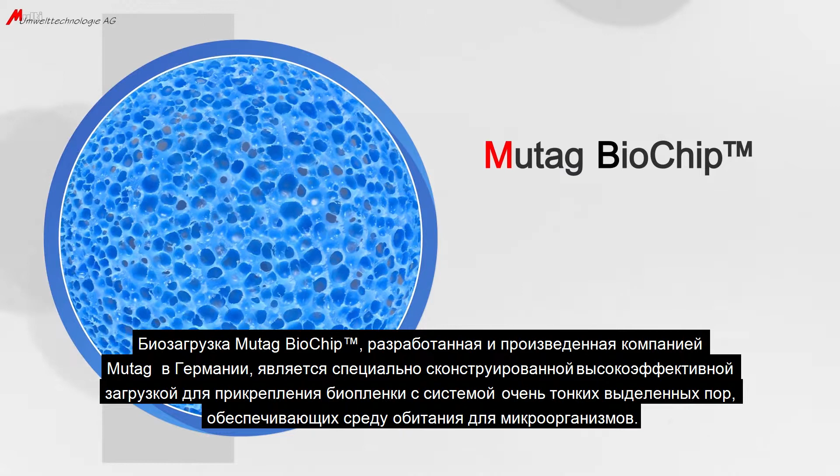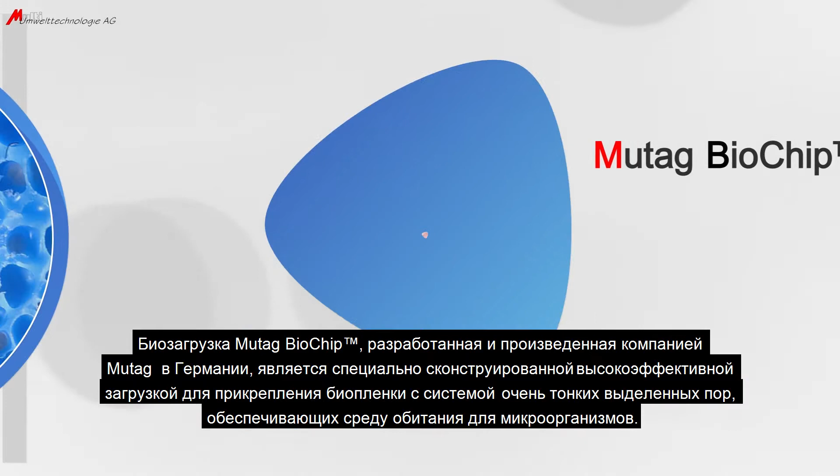The Mutag BioChip, developed and produced by Mutag in Germany, is a specially designed high-performance biofilm carrier with a high-grade pore system which provides a habitat for microorganisms. It is based on experience and extensive research and development. There are several hundreds of successful applications worldwide.

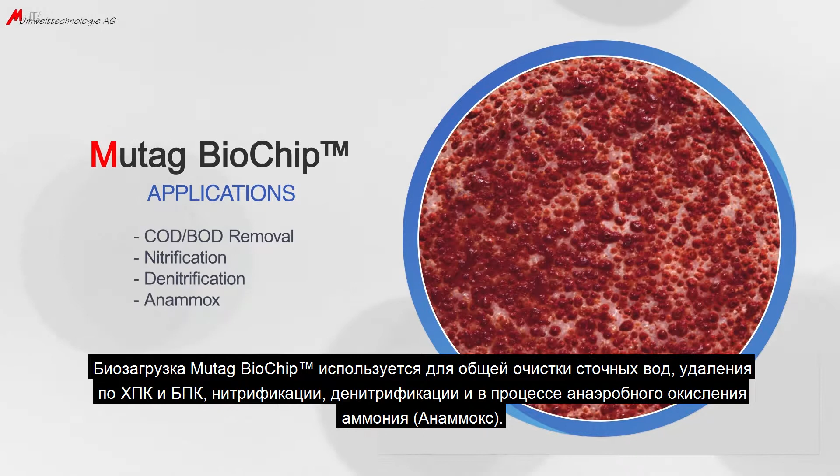There are MBBR plants which are treating more than 50 tons of COD per day, or more than 3 tons of ammonia per day. The Mutag BioChip is used for water and wastewater treatment in general for COD or BOD removal, nitrification, denitrification, and also for Anammox application. The Mutag BioChip is also used in many aquaculture applications for denitrification and nitrification too.

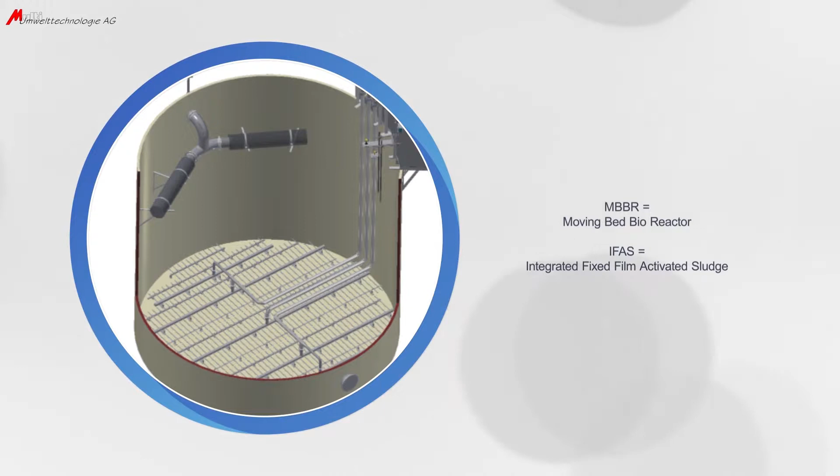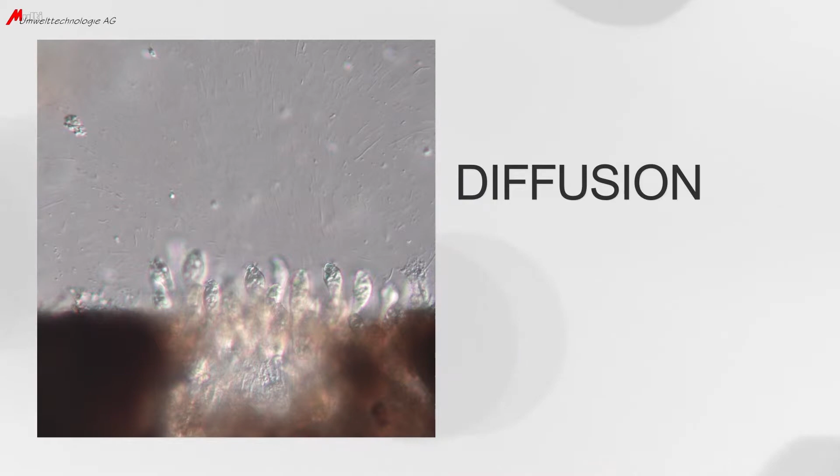The Mutag BioChip can be used in MBBR-based plants or in combination with activated sludge as IFAS system. The Mutag BioChip provides a lot of advantages, whereas we will now especially focus on the subject diffusion. As known from biochemistry and cellular biology, the exchange of substances and oxygen is essential for cells as a precondition to uphold their metabolism. In order to keep them alive and active, the microorganisms need to be supplied with nutrients and oxygen, which is the sticking point that leads us to the topic diffusion and diffusion depth.

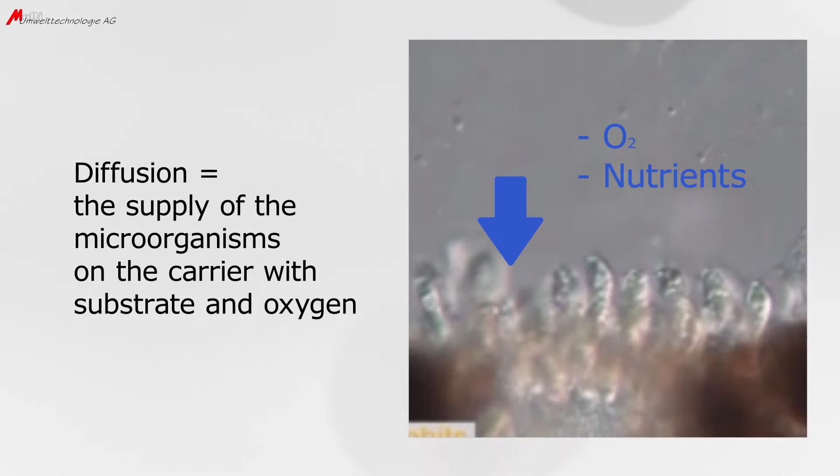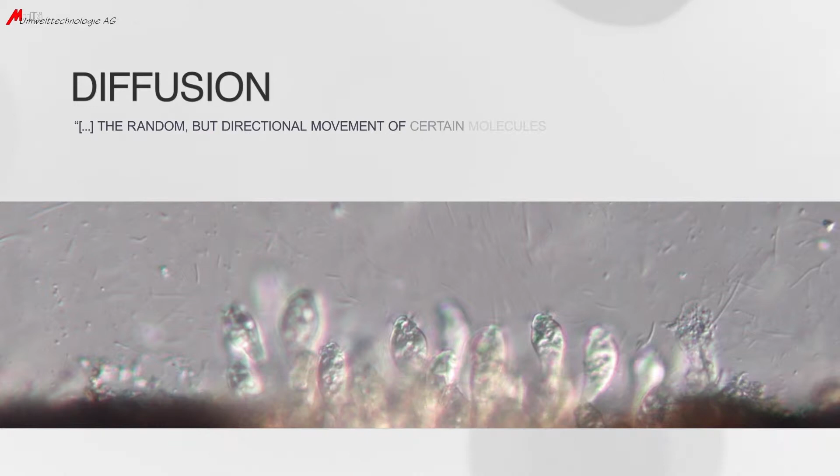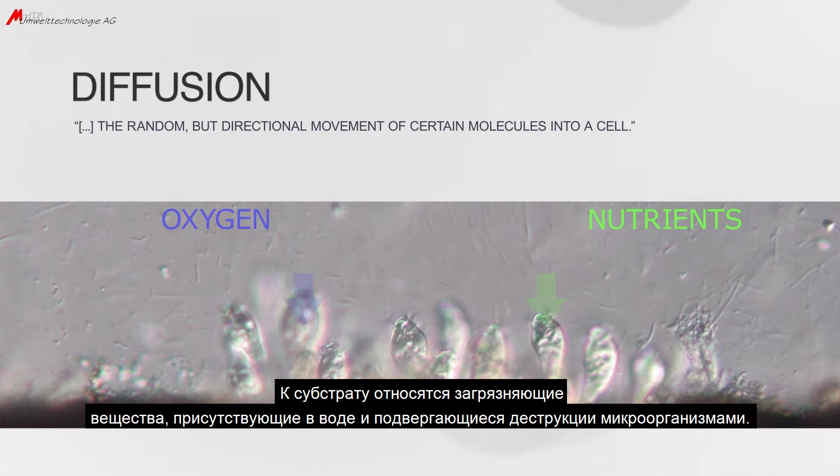As per the definition, diffusion shall mean the random but directional movement of certain molecules into a cell. The diffusion effect in biofilm processes has to be understood as the feed of substrate and oxygen molecules into the active biomass. Nutrients, like for example phosphorus as well as oxygen, diffuse from the surrounding water into the active biofilm and supply the microorganisms in the pores. In other words, diffusion is to be understood as the supply of biofilm or the microorganisms on the carrier with substrate and oxygen. Substrate refers to the pollutants being present in the water which are to be degraded by the microorganisms. A sufficient diffusion is an essential factor for the removal performance of active biomass.

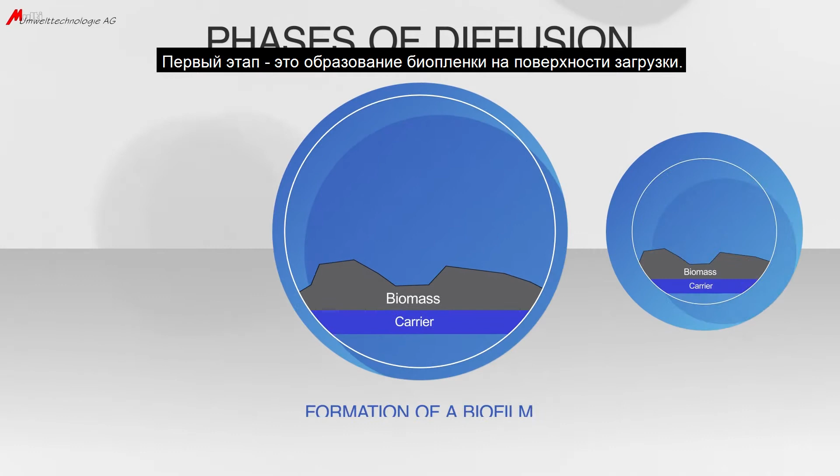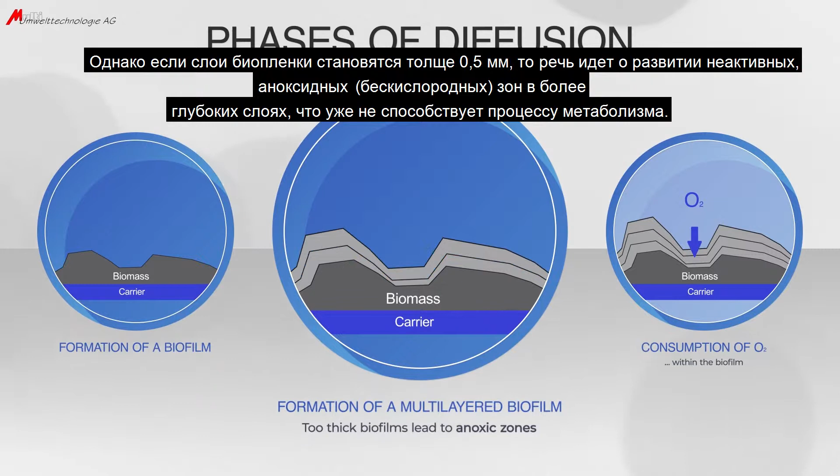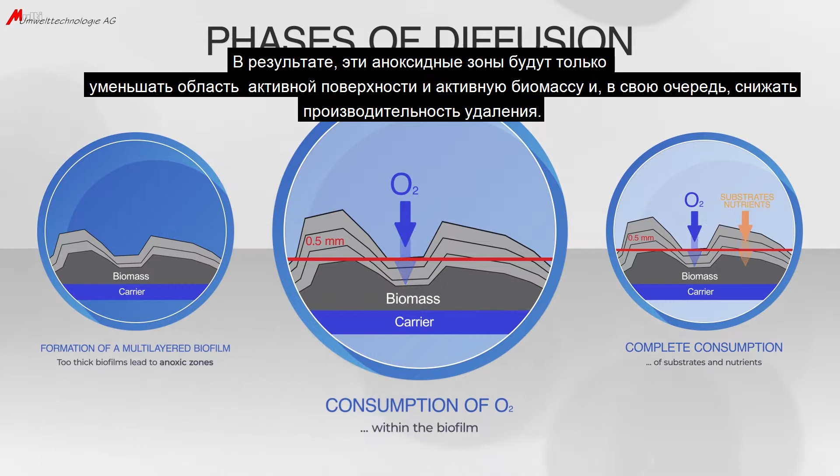The diffusion depth is limited to approximately 0.5 millimeters, which can also be found in related technical literature. The term diffusion depth shall mean the limit of a biofilm layer thickness up to which the biofilm can still be sufficiently supplied with nutrients and oxygen. There are different phases of diffusion. The first one is the formation of a biofilm on the carrier surface. Then, the biofilm is getting thicker. However, if the biofilm layers are getting thicker than 0.5 millimeters, it comes to the development of inactive anoxic zones in the deeper layers, which will not contribute to the metabolism process anymore. As a consequence, these anoxic zones will only reduce the available active surface area and active biomass and in turn will lower the removal performance.

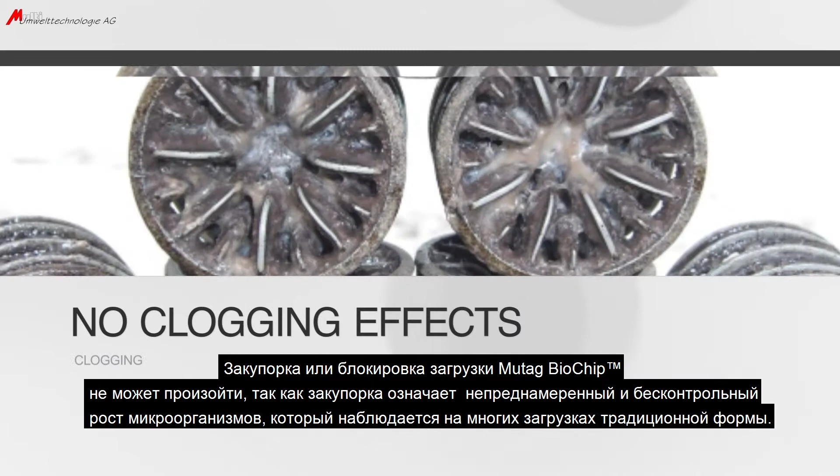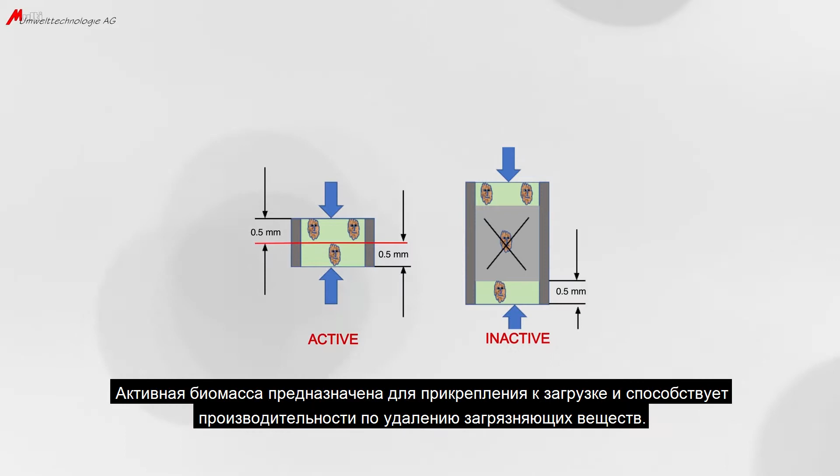A clogging or blocking of the Mutag BioChip cannot occur, whereas clogging shall mean the unintended and uncontrolled growth of microorganisms, as it can be observed with many conventional tube-shaped carriers. At this point, it is of special importance to distinguish between active and inactive biomass. Active biomass is intended to be kept on the carrier and contributes to the removal performance. Inactive biomass is dead biomass, which can clog conventional carriers and only reduces the removal performance.

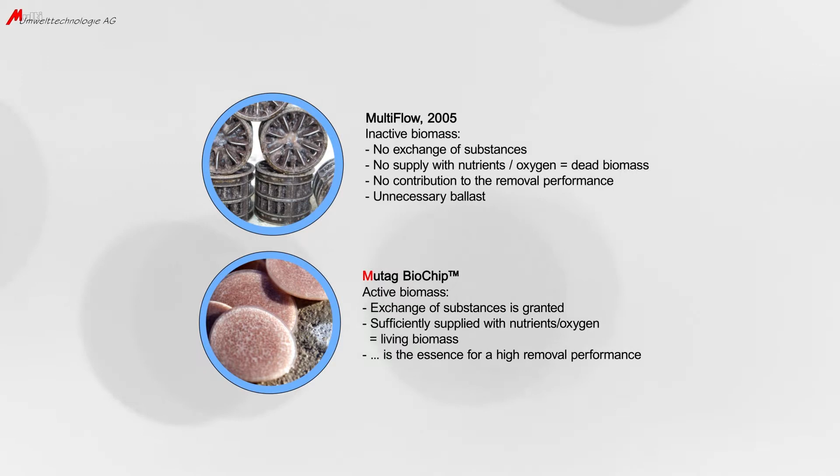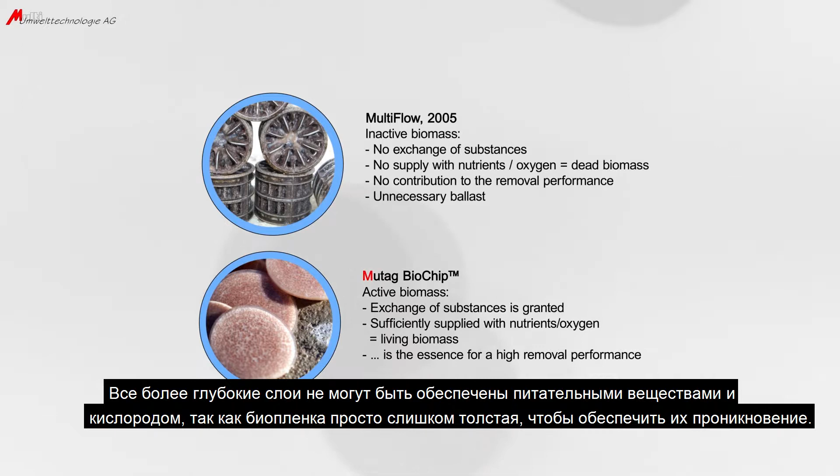As you can see here, both carrier types contain biomass. The tube-shaped carrier is completely stuffed with biomass, whereas the limited diffusion depth of 0.5 mm will take its toll. Only 0.5 mm of all the external space is occupied with active biomass. All deeper layers cannot be supplied with nutrients and oxygen, since the biofilm is simply too thick to be supplied. All biomass located in the deeper layers does not contribute to the metabolism process, and is hence unnecessary ballast, which is still being moved around the MBBR, having a negative impact on the operational costs.

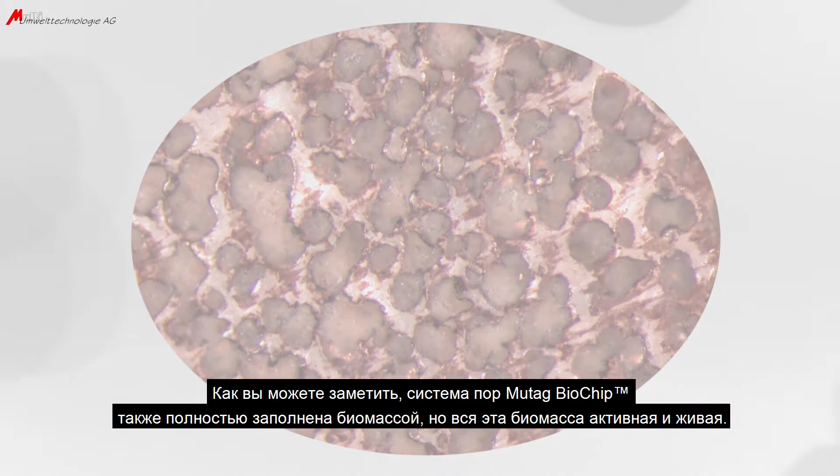As you will observe correctly, also the pore system of the Mutag BioChip is completely filled with biomass, whereas the point here is that all this biomass is active and alive. In fact, the Mutag BioChip provides a self-cleaning effect, which ensures that clogging is simply not possible to happen. Due to their specific shape and the light weight, the Mutag BioChip carriers provide excellent motion characteristics, and once the carriers collide with each other or with the tank wall, any excess biomass which is trying to grow out of the pores will be sheared off, the so-called self-cleaning effect. Consequently, the biofilms are permanently kept at a thickness of 0.5 mm from both sides, whereas an optimal biofilm layer thickness and optimal diffusion is attained.

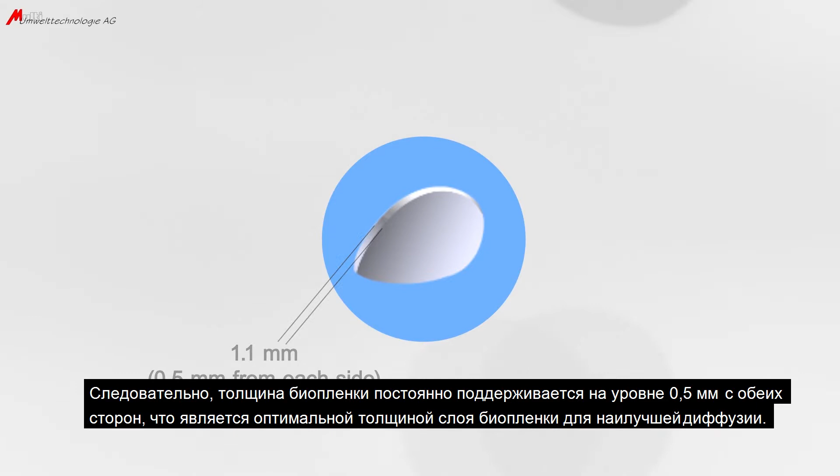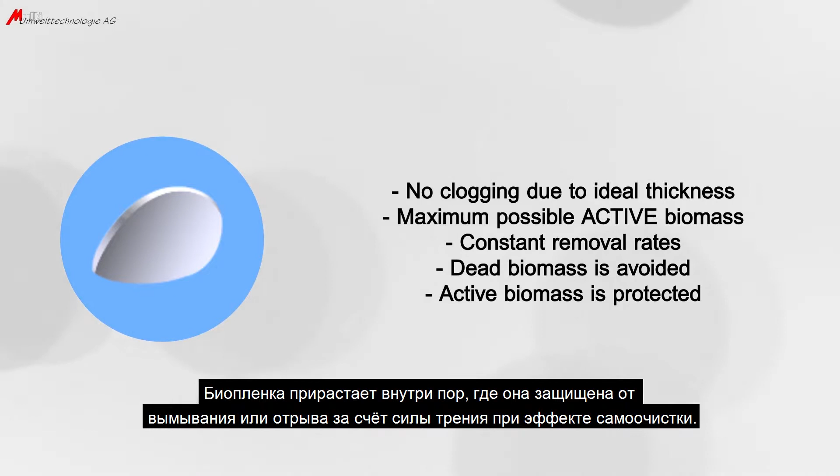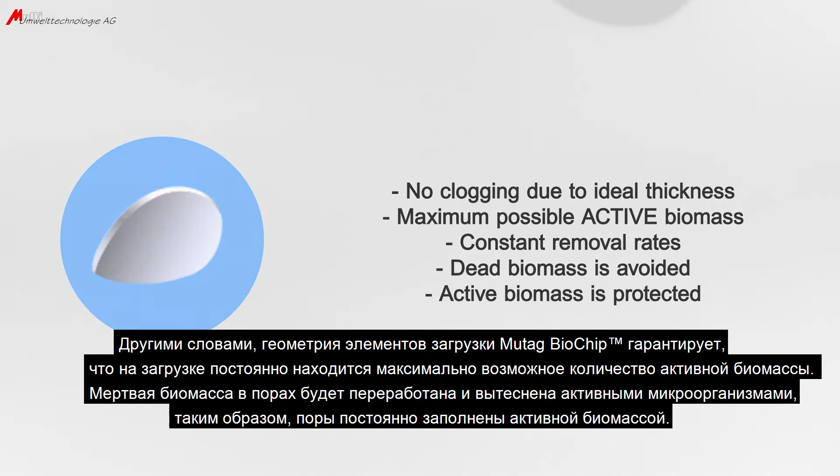On the other hand, there is no need to worry about a potential loss of active biomass on the Mutag BioChip. The biofilm establishes inside of the pores, where it is protected against being flushed or sloughed off by the self-cleaning effect. In other words, the geometry of the Mutag BioChip ensures that the maximum possible amount of active biomass can be permanently kept on the carrier. Dead biomass in the pores will be metabolized and displaced by active microorganisms, whereas the pores are permanently filled with active biomass.

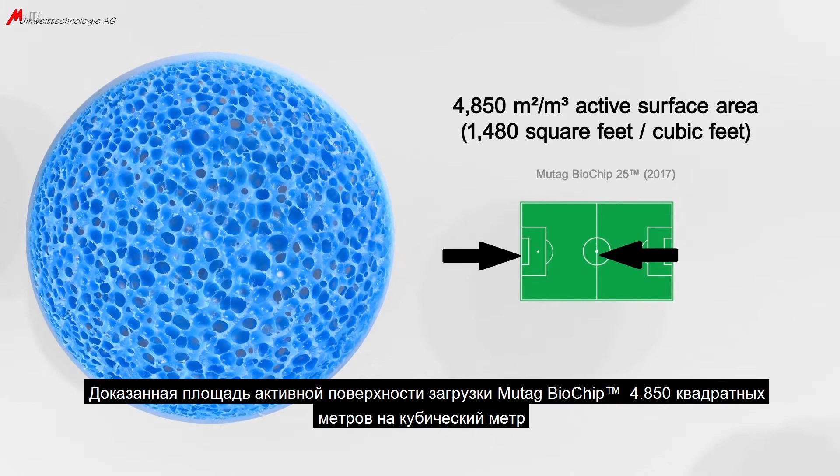The active surface area of the Mutag BioChip is certified with 4,850 square meters per cubic meter or 1,480 square feet per cubic feet. It is, however, not the surface area which is important for the removal performance. Crucial is the amount of active biomass in the pore system. A pure surface comparison of porous carriers is not correct and can lead to extreme differences in the removal performance.

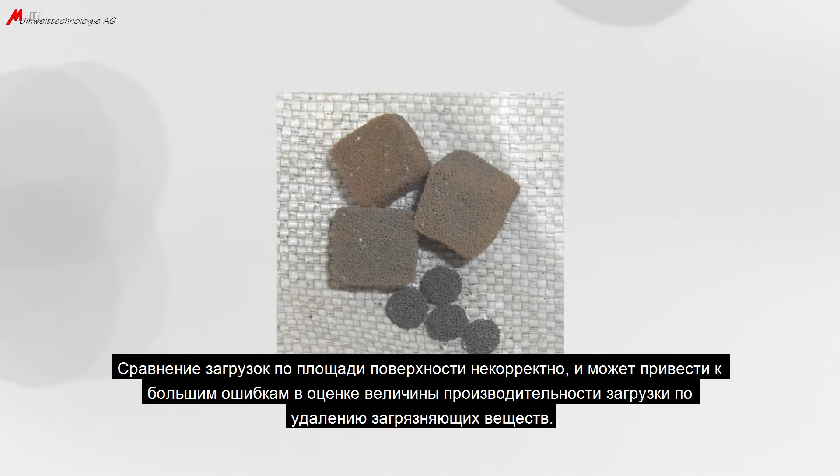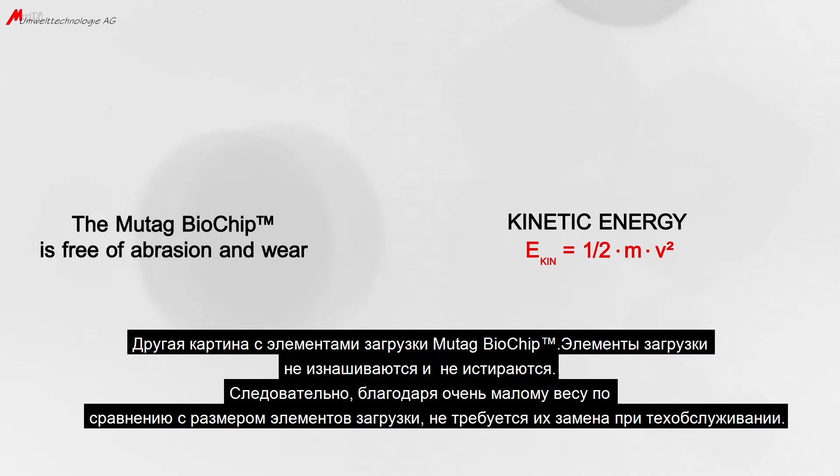These pictures present breakage and abrasion. The abrasion is caused by the high kinetic energy which affects the carriers in the moving bed once they are colliding with the tank walls or once they chip off and abrade each other at high filling rates when colliding. On the contrary, there is no wear or abrasion on the Mutag BioChip. Therefore, no maintenance, exchange or replacement is required due to the very low mass compared to its size. Simply brilliant.

To summarize, we would like to name some further advantages. The Mutag BioChip provides an active surface area of 4,850 square meters per cubic meter. Due to the optimized pore structure, the Mutag BioChip can attach a manifold of active biomass than other foamed carriers can. The Mutag BioChip is made from virgin PE, whereas its density and quality is controllable.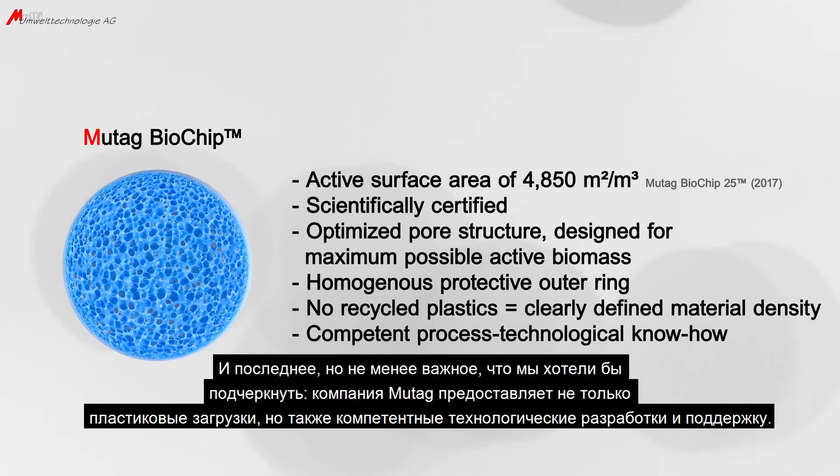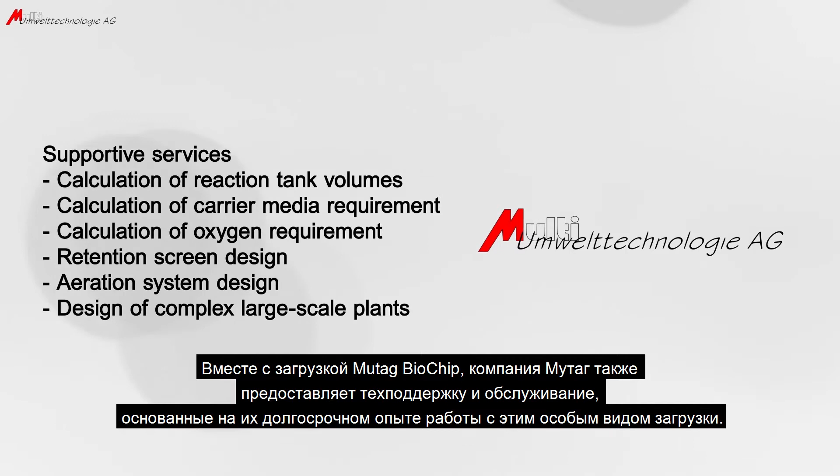Last but not least, we would like to highlight that Mutag does not only provide a plastic carrier media, but also competent process technological know-how. Mutag staff gained more than 20 years of experience in biological water treatment, and their process know-how was the basis for the development of the Mutag BioChip. Together with the Mutag BioChip carrier, Mutag also provides related supportive service and assistance based on their long-term experience with the special carrier media. Don't forget, Mutag is your partner and Mutag assists you with know-how.